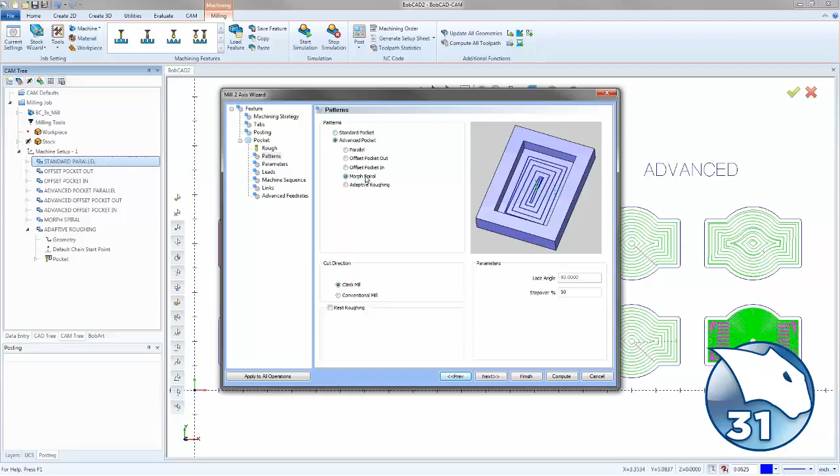Now, the morph spiral has been created to maximize the efficiency of the offset pocket. By morphing the offset shape into a spiral, we help to eliminate the slowdowns of those linking motions. And then we still have our adaptive roughing. So if I hit finish right here, we can see the standard toolpaths are all here.

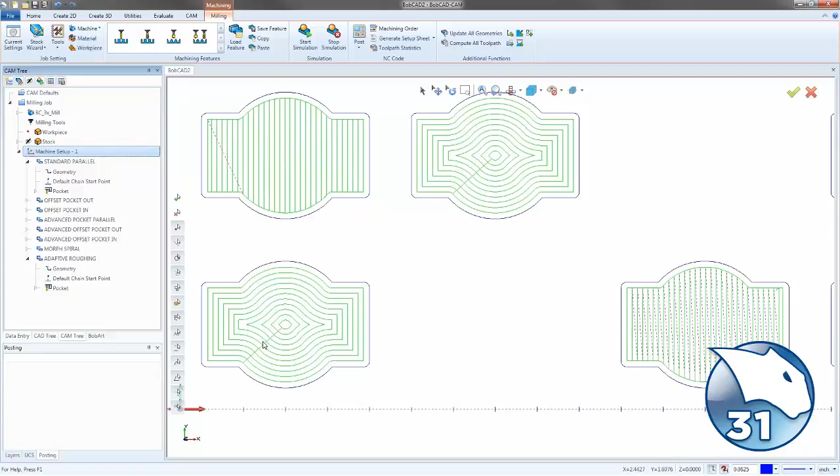This is our parallel or zigzag. This one here is the offset pocket out. So it's starting on the inside and working its way out. And then we have the offset pocket in, which is starting all the way on the outside and then working its way in. Now, to compare that to their counterparts from the advanced, right here we have the parallel.

So it's not doing a zigzag, it's doing a zig. So it's cutting once and then rapiding back and then making another cut. We could change that option just by turning on zigzag. Right here, we then have the offset pocket out. So again, it's just going to start from the inside, work its way out, but this one does allow you to do open pocketing. Same with any of these advanced, so we have that ability to do the open pocketing.

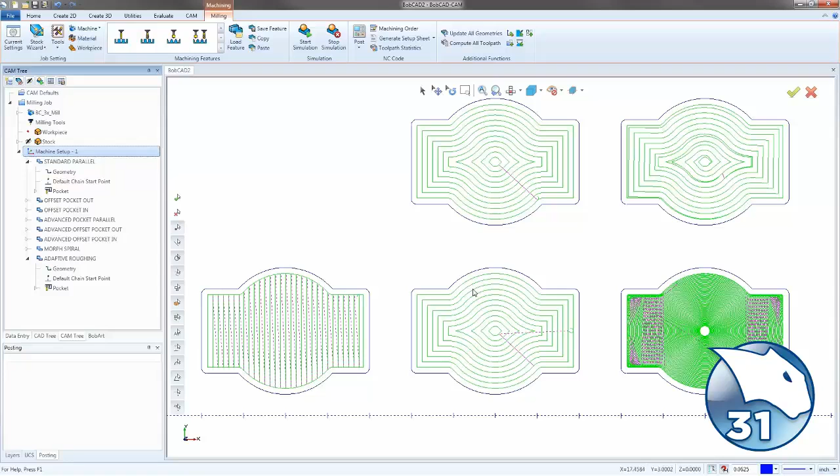Right here, we have the offset pocket in, and we can see it's going to start on the second line right here, and then work its way into the part, and then come back and do the final pass right here on the outside. Then we have the morph spiral. So the big thing with the morph spiral is a lot less linking has to be done. Maybe in some sections, depending on the shape, this is the one link we have. Other than that, the whole pass around is using a spiral. So it's slowly working its way out as it cuts.

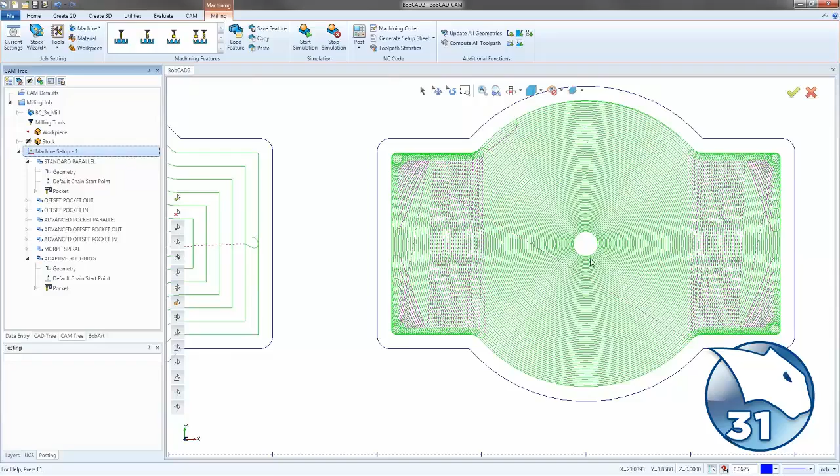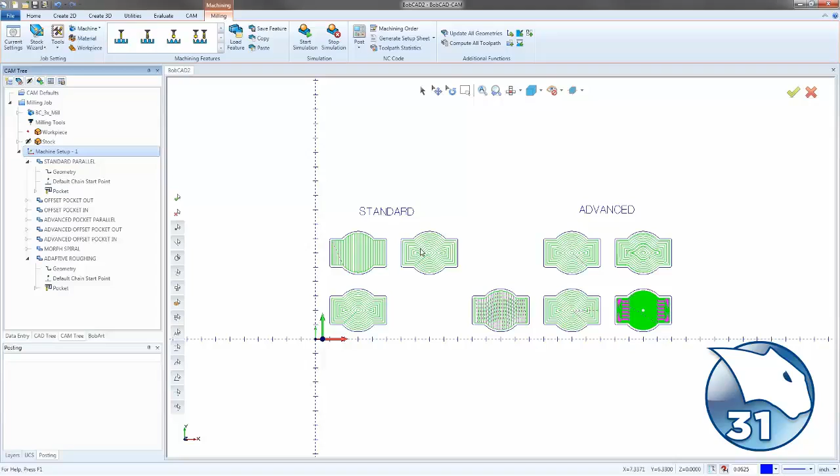And then we have the adaptive roughing, which allows us to go in, use a spiral for as much as we can, and then trochoidal machine whatever we need after that. So we have a lot of new patterns for pocketing. You have the standard and the advanced. And just remember, the advanced can do pretty well everything the standard can do, but they can also go outside the geometry. So if you draw a dotted line for an open pocket, the advanced toolpaths will leave the pocket. And that concludes the video on the patterns for the pocketing inside of version 31.